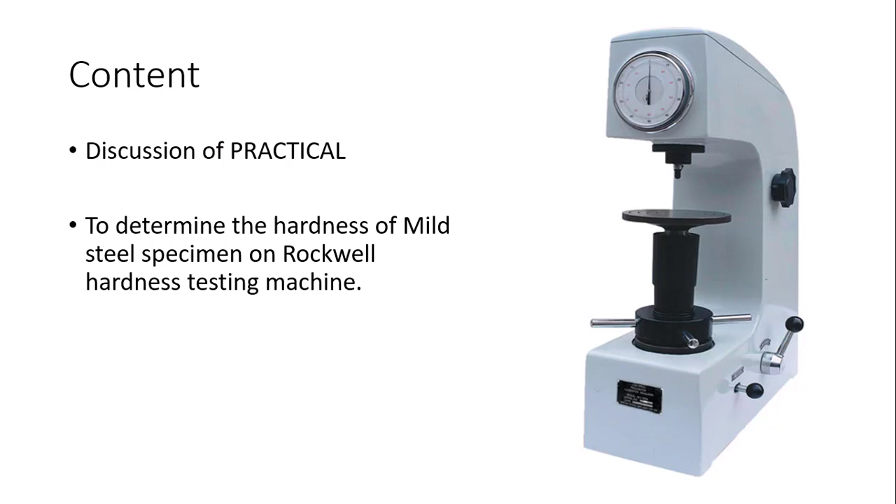Rockwell hardness testing. Both Brinell hardness and Rockwell are checking the hardness of any kind of material, but for this specific practical we are using the Rockwell testing machine. In this Rockwell testing machine we are checking the hardness of mild steel. Correct? As you can see on the right side, you can see the image of the Rockwell hardness testing machine. Fine. So what equipment is required?

In this case we require a Rockwell hardness testing machine, for which you can see the number of parts are given over here, and the front view and side view of the machine are given. In this case, this is a dial, this is a loading hand wheel through which you are applying the load. Then the screws, the indenter. Yes, I need to explain this indenter.

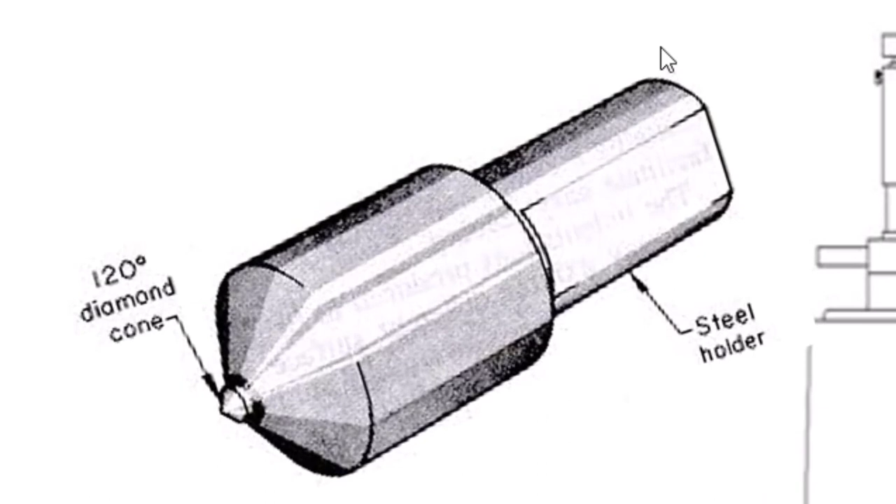We are using two types of indenter in this case: the steel ball and the diamond cone indenter. In the previous practical we used the steel ball, but in this case we are using the diamond cone. Correct? Sometimes it is called a cone indenter. So in this case, for the diamond cone indenter, the angle would be 120 degrees. There are different kinds of angles provided to the cone.

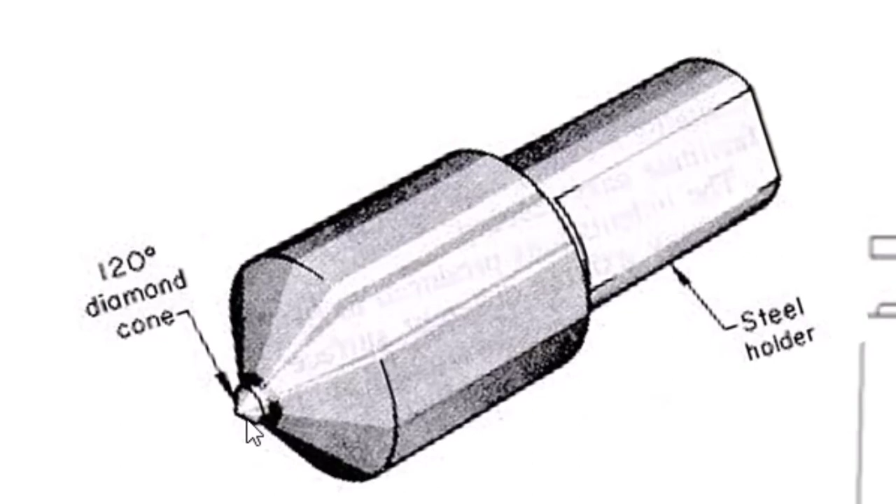Fine. So in this case the indenters are there, and the test anvil on which you are placing your testing or sample material. Then this is a loading changing wheel, through which you are applying the load. In this whole system we are applying the load hydraulically. Correct? Fine. Then the lifting rod is there, which is moving your sample material up and down. Then the rotary wheel to set up the exact location where you want to place your indenter.

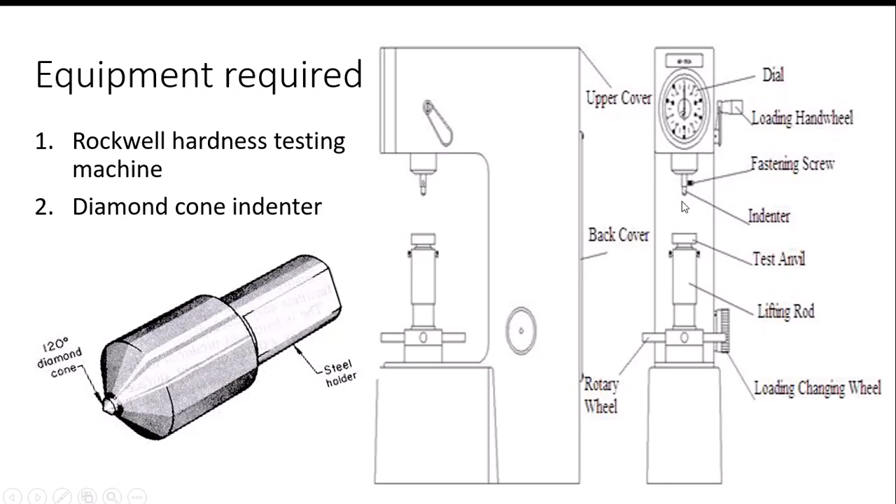Correct? So whenever you push the indenter, here I wanted to show the dial indicator. In the dial indicator, if you go deep into this, you can see there are two types of scales given: the inner scale and the outer scale. The inner is the B scale, and the outer is the C scale.

So when are we using them? The B scale is used for the steel ball indenter. Correct? If your indenter is a steel ball, then you will use the B scale. If you are using the diamond indenter, then you will use the C scale. Fine. So in our specific case, we are using the diamond indenter, so we are discussing the C scale.

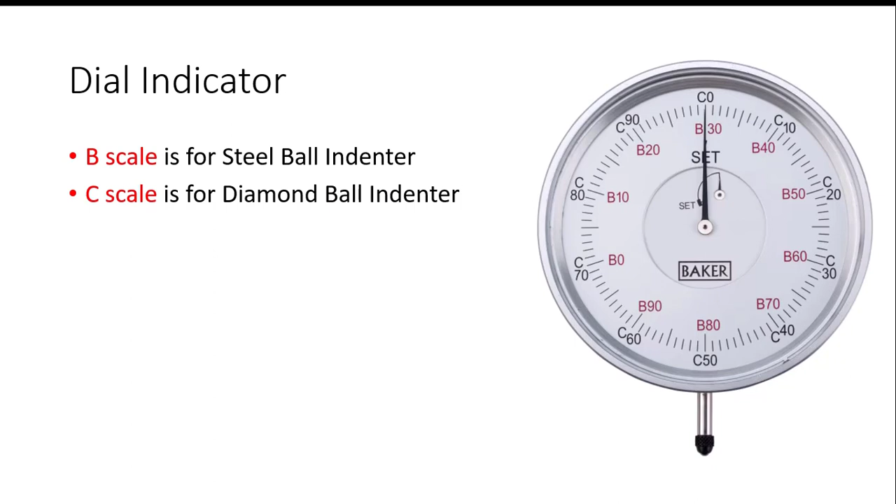Fine. And what is the procedure? So why are we doing this actually? Correct? You can see there is a ball indenter, and there is a diamond indenter or cone indenter. How are we pressing? There are two types of loads provided: the initial load, or you can say the minor load, and the major load, which you can see over here.

In this image, you can see there's a diamond indenter with the angle 136, but actually we are using 120 degrees. This is the ball indenter. You can see the impressions made by these two. Correct? So these impressions are made. Firstly, you put the minor load or the initial load, through which you get the height h0. Correct? We are not getting into the calculation of this, but yes, we are doing it.

And then the second one, when you applied the minor load, then you go for the major load, the P1. This total load is provided onto the indenter. Correct? It gets to the h0 height. Then you are releasing the major load, and you can get the reading of it.

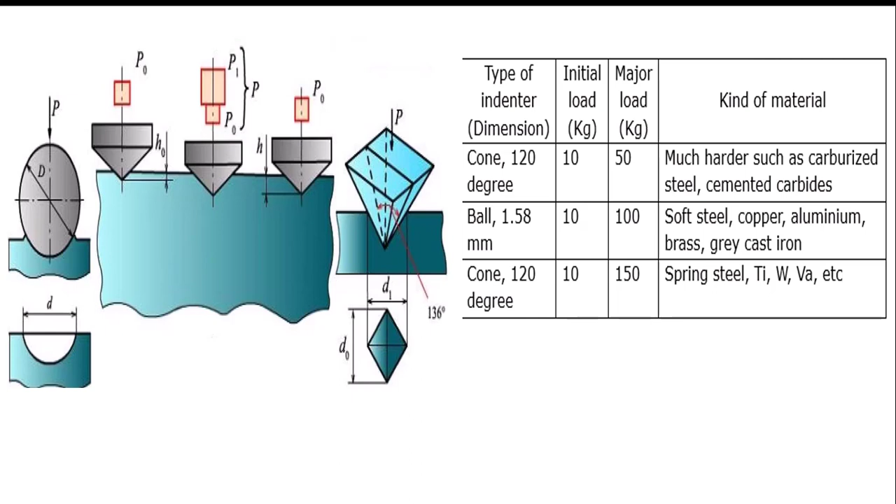So if it's a soft material, copper, aluminium, you will use the ball indenter, with the initial load, the minor load, 10, and the maximum load 100 kg. So you need to know how to convert this 100 kg into Newton, where the multiplier factor is 10, or the gravity. Then it is converted into your load.

Then what is the procedure to follow? Correct? The procedure is to place the specimen, your sample specimen, onto the anvil. So what you will do here, firstly you just touch it with this indenter. When you touch it, your dial indicator will show some reading, and after that you need to set the scale to 0. Correct?

Place the specimen securely upon the anvil. We did that. Elevate the specimen so that it comes into contact with the penetrator and put the specimen under a preliminary or minor load. Then we need to apply the major load. Once it is in touch with the sample, you need to read any deflection in the dial indicator. Once the deflection is made, it means your sample material and the load are in contact. Then you set this scale to 0, correct?

Then you set your scale to 0 and then you apply the major load. When applying the major load, you need to find out where the pointer's last point is, correct? Once you read the last point, that will be your hardness number, correct? As you can see in this image, once you applied the major load, after some time it settles, then you will read a reading like HRB 94.

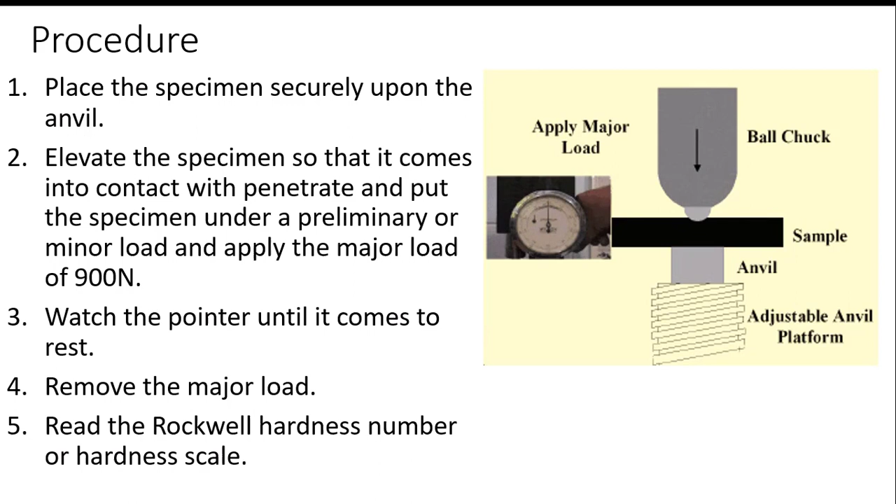Fine. In this case, you will find the reading directly. In the Brinell hardness test, you need to calculate it, but in this case, you will directly read the scale or the indicator and get the reading, correct? As you can see here. Once you applied it, you will finally find what reading it is giving. That reading will be your Rockwell hardness test number, correct?

Once again, the sample material is placed over here, then you apply the minor load and check the dial indicator deflection, then set the dial indicator deflection to 0. Once you set it to 0, you apply the major load. The needle will again rotate and settle at a final point, and that point will be your Rockwell hardness number. It is specified as HRB, correct? So no calculation is required. In this case, you directly get the hardness number.